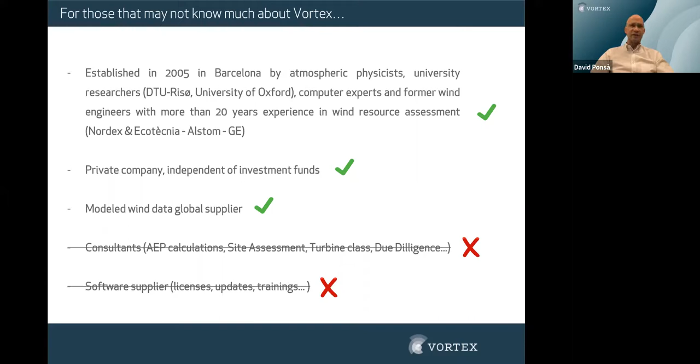We're not consultants. This is very important. We do not do any site assessment or similar. We just supply modeled wind data to our customers. Some of them are consultants, so we cannot compete against them, right? Anywhere in the world, both for onshore and offshore sites. And we do not sell any software license. In fact, our data can be used as input for most common resource assessment softwares out there, such as OpenWind, WindPro, and WindSim. Okay.

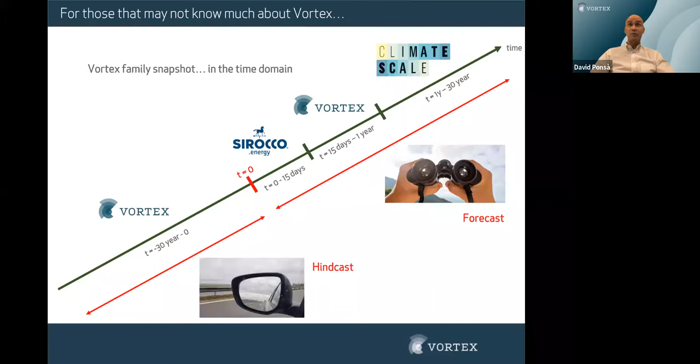Vortex has focused historically on hindcast kind of solutions for wind energy, but our family is growing. So you can see now here we have two new babies, two spin-offs to work also on forecast solutions for the short term, which is Sirocco Energy, and the long term, which is climate scale. And we will soon release a seasonal solution for the midterm forecasting, so please stay tuned for that, right?

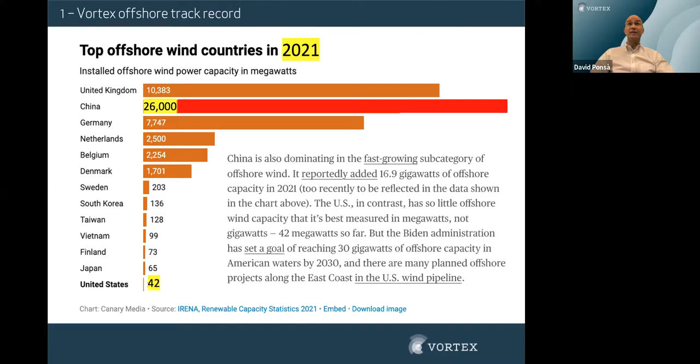Let's go on to talk about the Vortex offshore experience. And we would like to start by looking at these figures. They're 2020, but we have some updates in 2021, in which we can see that China has overpassed Europe in this ranking. And according to these figures, Chinese offshore current capacity seems to be close to 26 gigawatts, whereas in the US we still just have 2 operating offshore wind farms for a total of 42 megawatts installed capacity. So there's still a long way to go.

But anyway, we'll see. Here we would like to raise question number 1. So Patricia, please proceed. Because we would like to know in what countries, in what areas in the world you are developing offshore wind farms. So as you can see this menu, you can start answering. And I guess most of them are here in the US, maybe a few in Canada, maybe Mexico is now struggling with new projects in onshore, so maybe too early for offshore. Let's see your answers; we will show the full results before the Q&A. Okay.

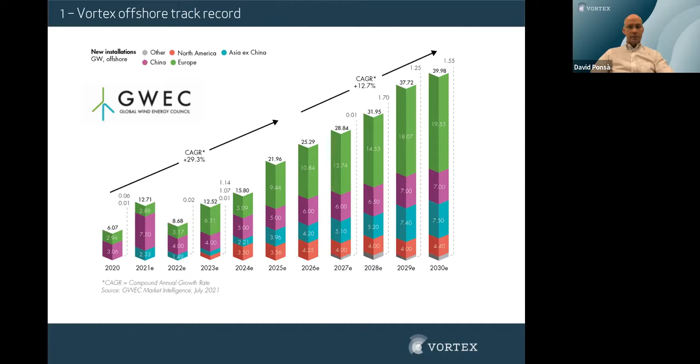Let's go to the next slide. Okay. At Vortex, we have basically supplied data for most of the offshore projects worldwide. And this is basically in Europe, but also US, China, and India. The thing with offshore projects is that, as you know, there are less measurements available since met mast or floating LiDAR deployments are both a high investment and not many companies can afford that. And the environment is also different compared to onshore sites due to the topography, and waves are also part of the game.

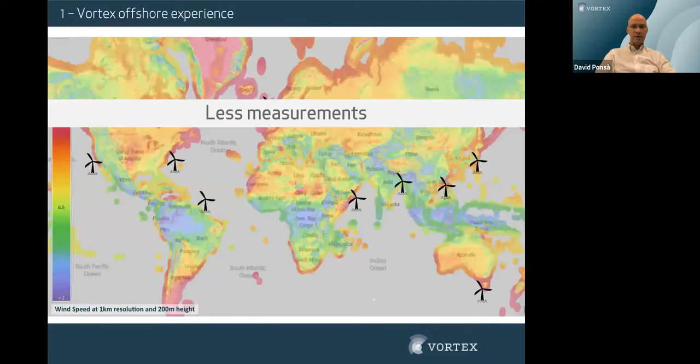Excuse me, there's something. Excuse me, sorry about that. Some issues with my presentation. There we are.

Let me tell you that at Vortex, we do not currently use a wave model in our offshore solutions. And as you may know, wind generates surface waves that then change the atmospheric conditions at the site. So it's pretty challenging. And there are some wave modeling companies out there. Most of them, in fact, are also Vortex wind data users. So at Vortex, we focus on our core business, which is providing modeled wind data, but we strongly encourage you to add wave modeling for your offshore site assessment.

That's a fact. Okay. Let's talk about the WRF model. So this is what we use. The WRF model is a state-of-the-art numerical weather prediction model. This is powered by NCAR. It's an open source tool used by many companies out there, research institutions, and a large community of developers all around the world. And Vortex, we are part of this community.

And these numerical weather prediction models are computer programs that solve the nonlinear equations that describe the atmosphere by means of mathematical methods and approximations that can be used to look ahead, so it's the weather forecast we see each day on TV, or looking backwards, which is called hindcast, and you know about local conditions, in our case, the wind anywhere in the world.

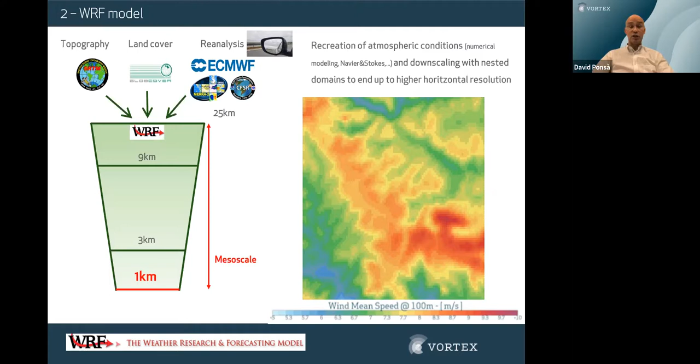We also use topography, the land cover, and the reanalysis data sets as WRF input data. And then we downscale by means of nested domains from low resolution grids, because 25 kilometers, the reanalysis is not good enough to take decisions on wind farm development. So we downscale and we can come up having high resolutions, which can be 1 kilometer or even 100 meters.

We have another question here, because we would like to know about the reanalysis, which is the main reanalysis data source that you're using. If it is ERA5, MERRA-2, or CFSR, obviously, depending on the site, it's also an option for you to answer, okay? Give you a few seconds to answer this second question today.

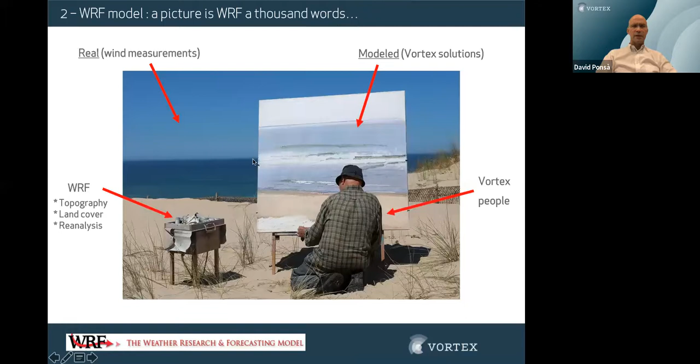And we can go now for the Vortex solutions. Let's see. Okay. I'm so sorry. I don't know why my slides are not working. Sorry about that. Let's see if I can fix it. I will have to maybe stop sharing and start again, because for any reason, I don't know what's going on here. Now, here we are. So sorry about that.

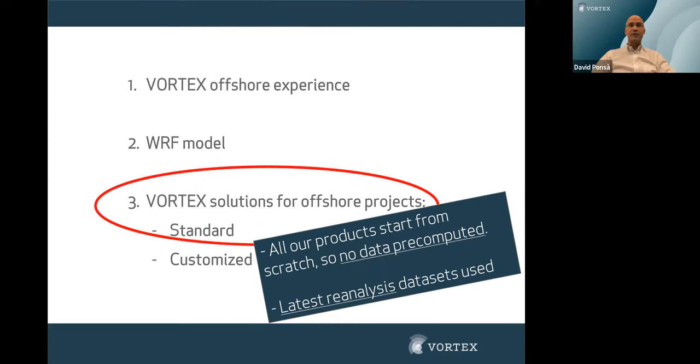So our project, it's a very important message that all our products, they start from scratch. So we do not have any data pre-computed. This is important. And so we make sure that the latest reanalysis data sets are used for any of the runs of our customers.

So let's go for the first product, our time series. That is what put us on the wind energy map about 15 years ago. These are used when wind measurements are available, but maybe just a few months of data, so long-term extrapolations are needed. This is computed with WRF at 3 kilometers horizontal resolution. It's an hourly timestamp, and we can pull out data from the last 10 years up to the last 38 years, right? The 3 reanalysis data sets are available, and series can be calibrated when there are on-site measurements.

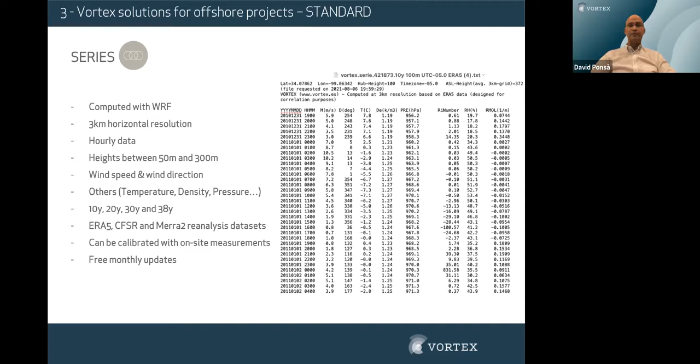In August last year, MetOceanWorks validated this solution for 13 offshore sites, comparing that to raw ERA5 data. And if you go to this link here, you can get this more than 150 pages document in our knowledge center. Here you can see all the sites that were validated. 3 of them are on the East Coast in the US. Also, you can see the time period and the different height ranges that were validated.

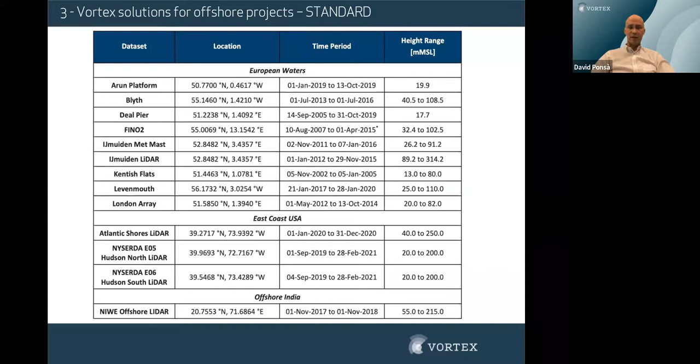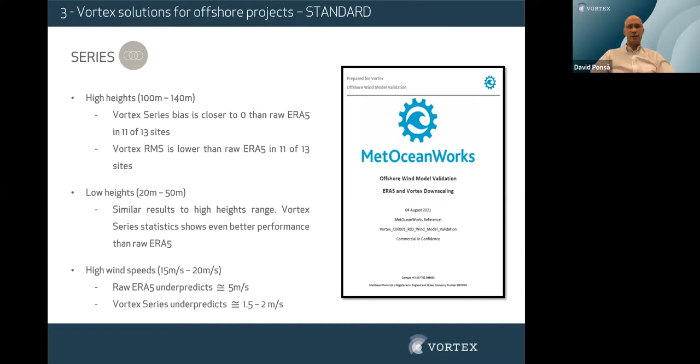A few takeaways are basically that both for high and low heights, Vortex time series perform better than ERA5, as you can see here for bias and the root mean square metrics. Even low height figures are slightly better than high ones. And for high wind speeds, our series underpredict in the range of 1.5 meters per second, whereas ERA5 data goes up to 5 meters per second. But as I said before, you can go through much more data and statistics when you download the full document, okay?

Next solution, that's FARM. We could say this is our second bestseller product. It's actually used when the wind farm area is already selected for site assessment and energy yield estimation. It's computed with WRF, high resolution maps, 100 meters horizontal resolution. We have 2 sizes, standard ones up to 500 square kilometers and large, which goes up to 2000 square kilometers. The basic outputs are WRG and WRB files, and it can also be calibrated, or what we call remodeled, with on-site measurements. The thing is that with FARM, you don't have time-dependent information.

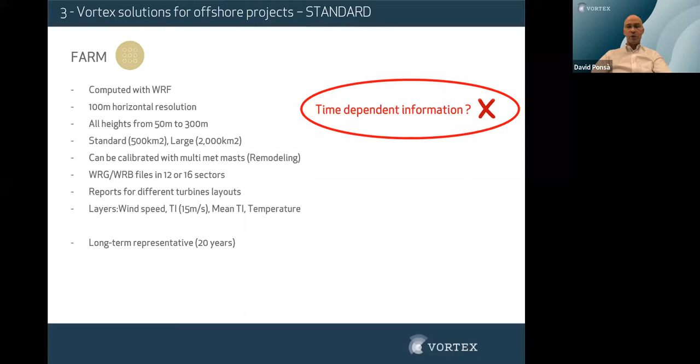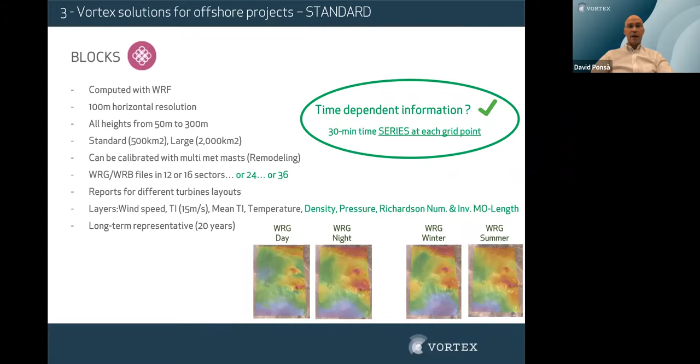So last year, we released BLOCKS, which can be seen like a step forward of FARM for a more detailed site assessment. Basically, same outputs with some extra features like the wind rose for 24 or 36 sectors and other data mainly for stability conditions. But very important, this is time-dependent information. So it's 30 minutes time series at each grid point, so many post-processing data filtering options for better seasonality analysis. And this is, for example, WRG, WRB files for day to night, winter, summer, and so on. And long story short, FARM plus SERIES, we end up having BLOCKS.

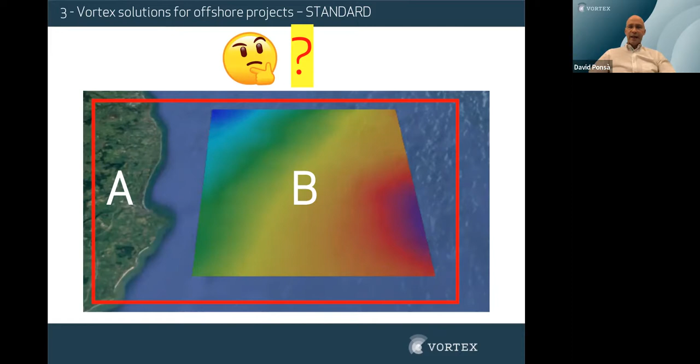And the answer is that there's no need to do that. The reason is that when we set up the WRF model, we include a much larger area than B in this case. So you can feel confident that area A will be taken into account, although we will deliver just the WRG files and all data for your area of interest. As I explained before, we downscale with nested domains to fully capture the atmospheric conditions in your area of interest.

And now, the next question arises, because we would like to know about your offshore wind projects and how large they are. So if you are developing offshore projects in less than 1,000 square kilometers, between 1,000 and 1,500, up to 2,000 square kilometers, or even more than that. So please feel free to select your answer to this question. That's the last one, and we will see the full results at the end of the presentation before the Q&A.

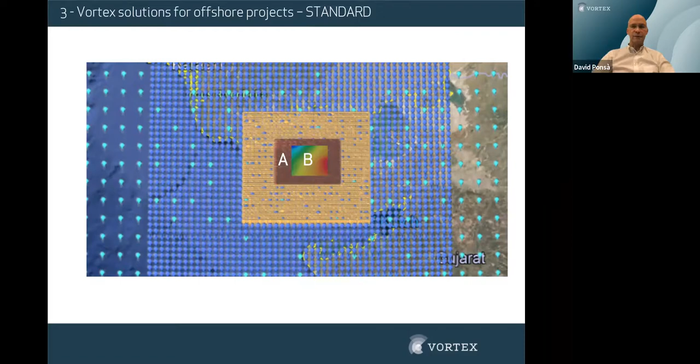Let's see if I can move forward. It looks like when we pull out a question, that's when it struggles with the presentation. Let's see if I can restart again, share screen. There we are.

So the next product is the LES, which is 1 year of 10-minute time series. It can be either a natural year or long-term representative. At Vortex, we were pioneers in commercial use for the wind industry back in 2016. This is a microscale product where data is computed at 4 Hz, which means 4 samples per second, and then aggregated into 10-minute values using Vortex LES, which is a CFD, a computational fluid dynamics algorithm based on large eddy simulations to solve the turbulent eddies, not just parameterize them like standard mesoscale work does, right?

And LES is basically for detailed ambient turbulence analysis, since it outputs the standard deviation data for both wind speed and direction. It is useful when no measurements are available or reliable to characterize the mean flow and turbulence intensity in future wind farms for site assessment, or operational wind farms for load assessment and lifetime extension programs. It can also be used to decide where to install a met mast in a site.

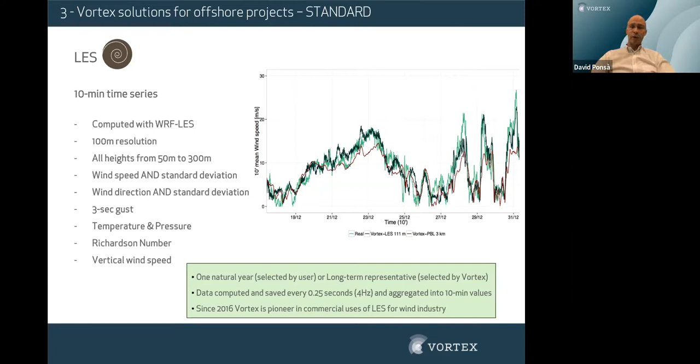Vortex LES is the closest thing to real measurements, since the data format is basically the same that you would get out of a data logger, but you can also have data up to 300 meters or higher, covering the whole rotor swept area. So even when specific hub heights are required, like 103, we can pull them out on demand and we do not charge any additional cost. All Vortex data with LES and all our solutions include all heights for the price.

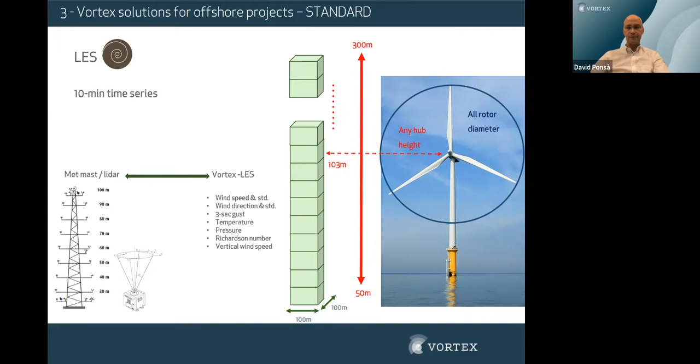One more thing about LES, we could think of it as a virtual met mast or LiDAR at each turbine position in a wind farm, and it could help to identify potential turbulence issues or underperformance in operating wind turbines. But let's first take into account that turbulence is a historical issue in wind energy. It can be mechanical, due to the terrain roughness and the wind flow around objects like mountains, hills, trees, or it can be ambient turbulence, caused by warm air rising up, essentially rising thermals of air generated by surface heating, right? This is the one that Vortex can help you with.

And when a year of measurements is available, the approach could be as follows, just some examples. That would be, for example, getting an LES at the met mast or LiDAR position for the same natural 1-year period of measurements. Then you can compare the real data against the model. So it's kind of like calibrating the LES. And then if the correlation is good enough, and the criteria of what is good enough is on your side, it's not on our side to decide, right? But if it's good enough, you can set up some kind of transfer function that you could then apply to those turbine positions that have issues or are underperforming, right?

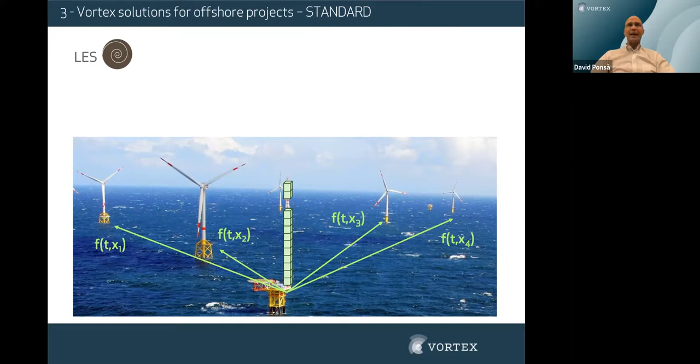Then you correct the data and you end up having some modeled turbulence intensity, analyze the data and then conclude if there's an ambient turbulence issue, okay? The question is, what if no measurements are available? Then the approach could be pretty much the same.

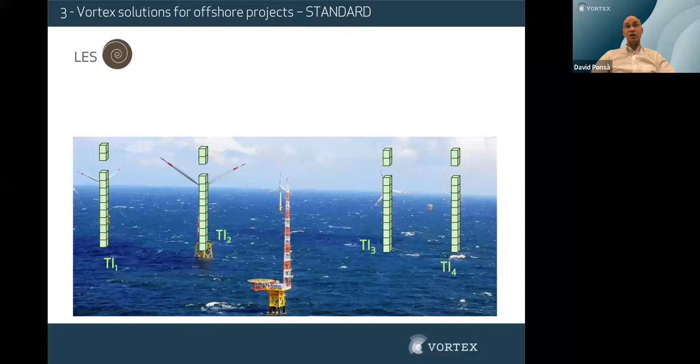So getting the Vortex LES, but not for a natural year, for the long-term representative at turbine positions that potentially are underperforming, but then modeled turbulence intensity data is obtained, but not calibrated with measurements. Is this a good solution? Maybe it is not, but it's better than nothing. So for a few $100 at least, you have some information that could be useful, okay?

We have many validations for LES. All of them are internal validations. Again, they can be downloaded if you go and access your user account or go to our knowledge center. In fact, we have an 18 offshore site validation document.

These are the sites. Unfortunately, only for 5 of those we got information about the standard deviation, so we could validate the turbulence. This is intended to be a dynamic document, so if we ever have access to new data sets that allow us to validate the turbulence, we will gladly do that for sure, right? And if you see, there are 2 of the sites that are in the US.

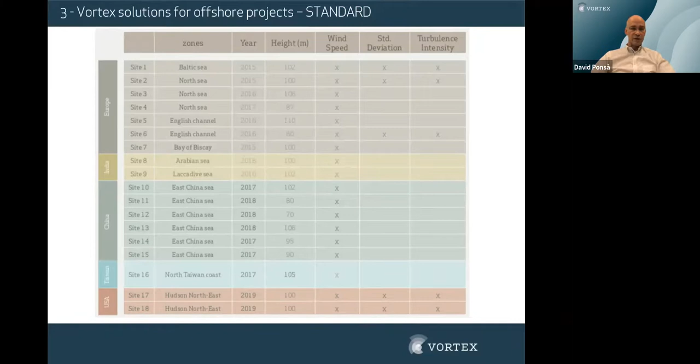Also, extremes, another product that could be of your interest, is useful when you need data on extreme wind speed events, right? This is also a microscale product computed with Vortex LES that outputs a 10 minutes time series of 6 complete days per year. So we select the maximum wind speed registered for the last 30 years, and we end up having 180 days time series, right?

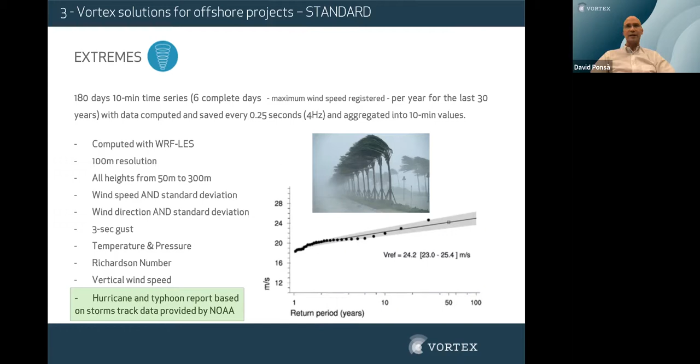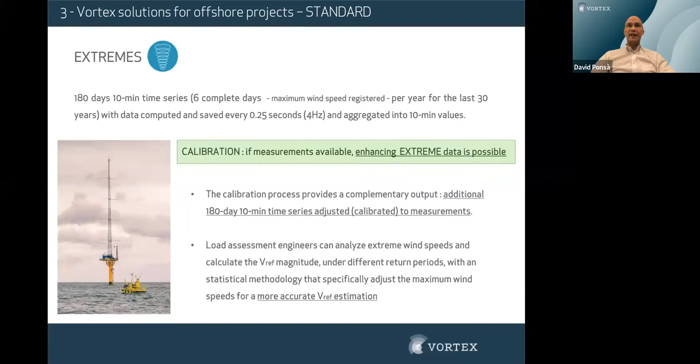The same kind of data like LES is included, but we add hurricane and typhoon reporting based on storm track data available, just to make things easier for our customers. And if you have measurements, then we can also provide an additional 180 days of 10 minutes time series calibrated with measurements.

Let's go to the customized solutions. But I would say that for better assistance, the very first thing you can do is contact us and explain about your projects and what kind of data you're searching for. That's it. These are two solutions that you may be interested in, which are offshore wake maps and low resolution grids. Let's start with the first one. So offshore wakes grid maps.

The wakes in the wind farms is something that, as far as we are aware of, still does not have an optimized solution out there, right? There's still a long way to go and a lot of R&D work to be done. One of the options is what is called the Fitch scheme, that includes the subgrid effects of specified turbines in both wind and turbulent kinetic energy fields. However, this parameterization does not consider the rotation of the rotor blades. Maybe CFD modeling would be a better approach to that, right?

The Fitch scheme is not recommended for high resolution simulations. And when I say high resolution, this is higher than 3 times the rotor diameter. So as a rule of thumb, if we consider a 300 meters rotor diameter, 3 times that is 1 kilometer horizontal resolution. That's what is recommended. And the Fitch scheme seems to be pretty much useful offshore, since the horizontal variability is smaller than onshore. And maps and WRG files at 1 kilometer resolution offer an accurate description of the wind resource.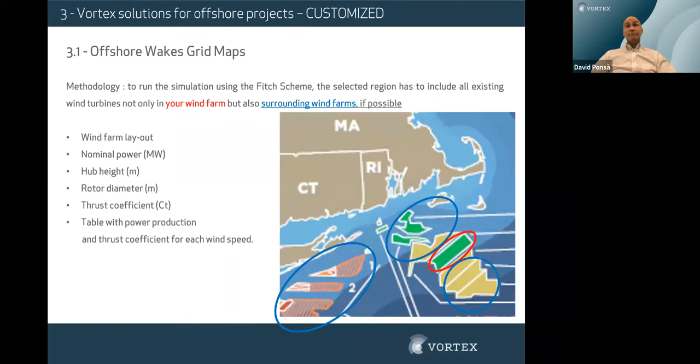This can be either the existing ones, where information is easy to access, or future wind farms, where it's not always that easy to get this information, but we suggest making some assumptions like number of turbines to be installed, the hub height, the rotor diameter, better than doing nothing, I guess. And for an isolated wind farm, the Fitch scheme does not seem to make much sense, right? This is an important message to take home.

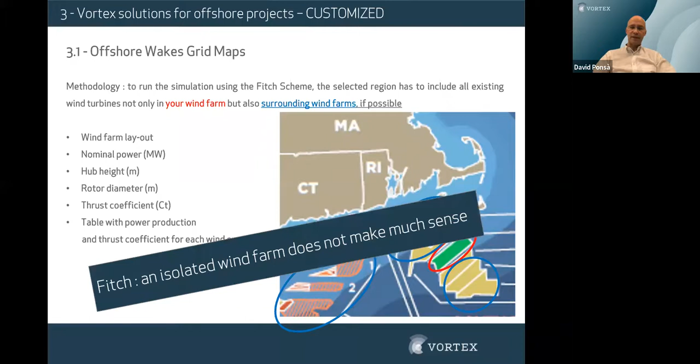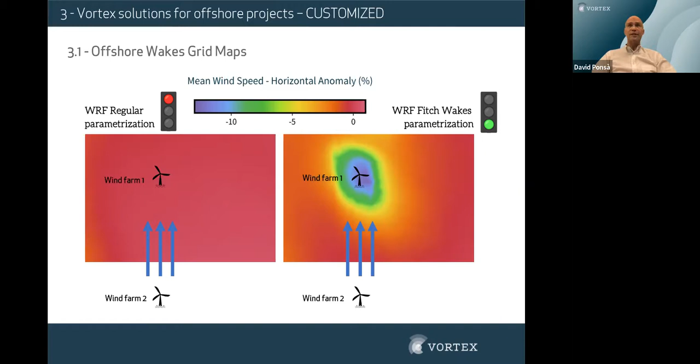See this example. This is a 400 square kilometer region with a wind farm south of this area. You can see the mean wind speed maps for the regular simulation at the left-hand side, and the Fitch wake simulation at the right-hand side, that is going to affect your future wind farm. This example shows how the Fitch scheme decreased the predicted wind speed up to 13% in the center of your wind farm. To sum up, only external wakes are recommended, not internal wakes yet, okay?

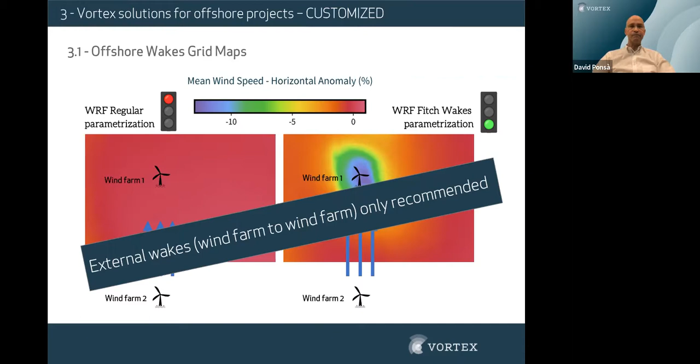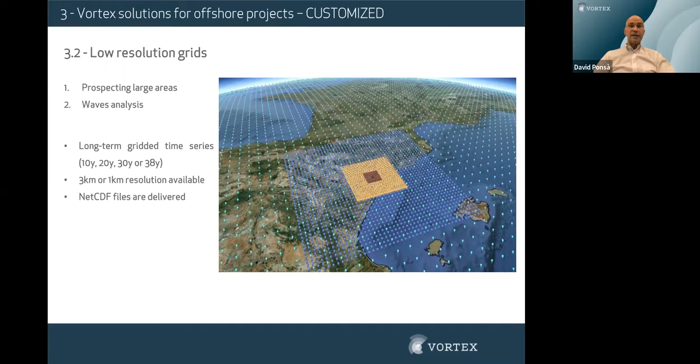Then last but not least, the second customized solution is low resolution grids that some customers use for either early stages of the offshore wind farm development, when you go to tenders and you need to have an idea of the wind resource in a large area, or even for wave analysis in the site. Since waves are created many miles away from your area of interest, long-term series seem to be a useful tool for that. So again, we can pull out from 10 years or even 38 years of data. And NetCDF files are available. So this has raw WRF output data for you to calculate.

And this is basically what I wanted to talk about today. Just wrapping up what we went through: we have supplied data for most offshore projects worldwide, we have standard offshore solutions, and we have extensively validated both internally and externally some of those solutions, but also we can customize anything that you can think of. So request your needs and we'll see what we can do.

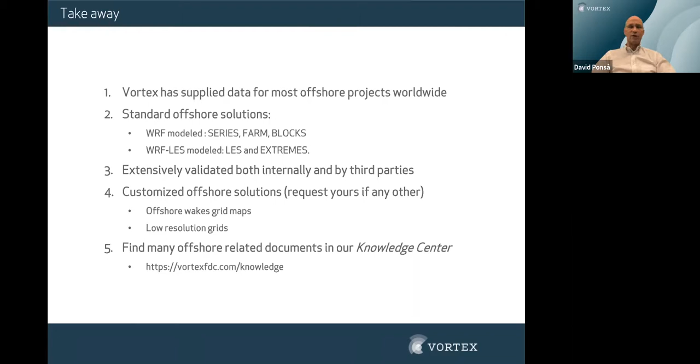And finally, you can go to our knowledge center, where you will see a lot of documented data for our offshore, not just offshore, but about all of our products.

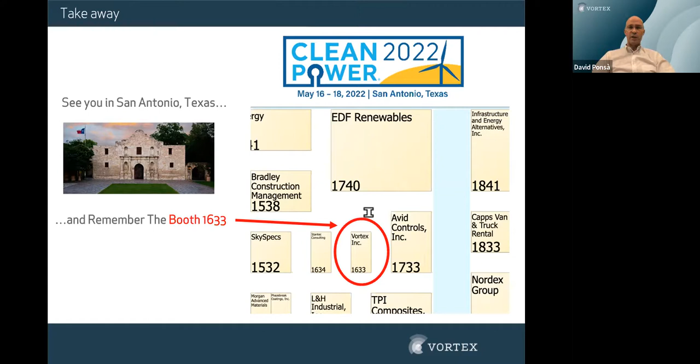This is it. I think we can start with the Q&A. Let me stop sharing my screen right now. Again, apologies when I got stuck, but we had some issues. Let's see the Q&A. Patricia. Thank you, David. We have some questions here from some attendees.

The first one is asking, can you use the Vortex series in initially assessing the wind resource in the area without any on-site measurement? Well, that's a tricky question. You can, but maybe you should not. Why? Because, well, it's better having this than nothing, but ideally, Vortex series are for when you have at least a few months of measurements, right? But maybe Pau can add something to that. But the best thing is that you have wind measurements. Then we can complement that.